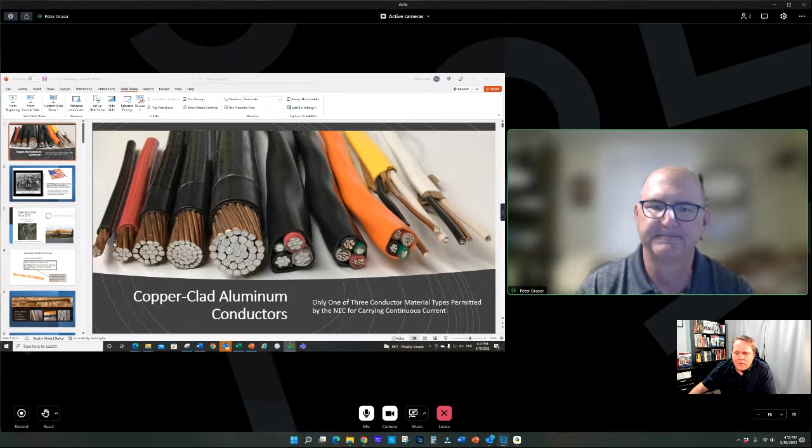All right, so are you giving me control of the screen? You got it, man, it's all yours. Okay, and so you can see this introductory page. Yep, the beautiful copper-clad aluminum that's there. We can see it, okay, good.

First off, we're going to talk a little bit about the history of copper-clad aluminum. As you can see from these conductors, these are 600 volt type conductors - that's where the majority of the work has been done with copper-clad aluminum up to this point. There's quite a variety of products made from it. From the left, you've got some THHN in different sizes, up to say 500 MCM, some NMB type cables, and CCA is also a product used in MC cable, which is one of the primary uses for it.

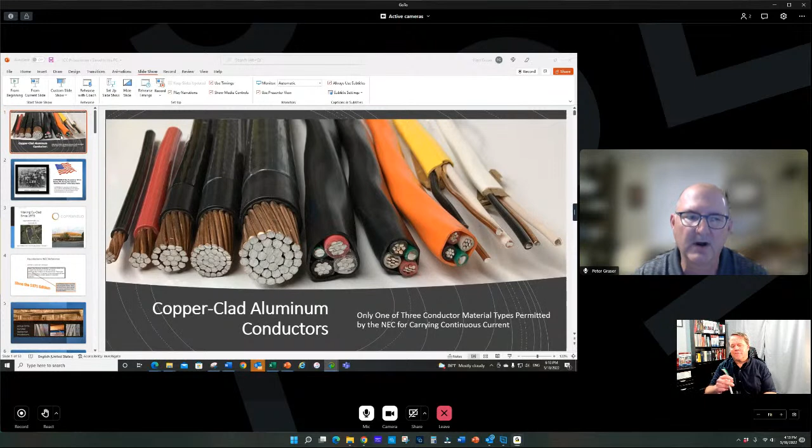So it's got a wide variety of uses. Copperweld was founded in 1915 in Rankin, Pennsylvania, and moved to Glassport shortly thereafter. It was basically, I feel - I'm biased of course - but I think it's a national treasure. It's endured the test of time, and it's a testament to the endurance of bimetals. Copperweld, at least the bimetallic division, which was the principal part of the business for most of its existence, made nothing but bimetals, and it's a testament to the product.

So today we're in Fayetteville, Tennessee, and we have a facility there. We've been making copper-clad aluminum there since 1973, 1974 - that's debatable about which year we actually started making CCA, but the plant has definitely been there since 1973. And we didn't start out making CCA.

We created CCA because of the need. There was a copper shortage. The Asian wars created this shortage of copper due to the need for brass in the country - Korea first, followed by Vietnam. It created an environment where we needed to stretch the supply of copper. Copper is a very valuable resource, take nothing away from it - it is one of the most important industrial metals to our future, and it must be conserved.

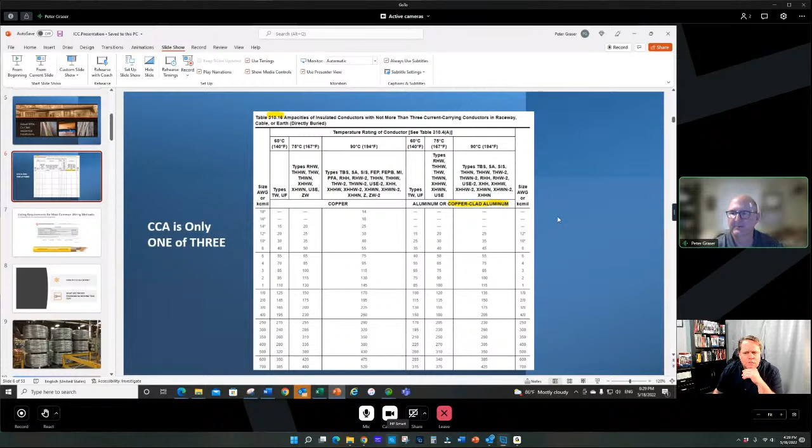Because we know that the product is being installed correctly, just by virtue of the fact that the color is the same as, say, a 14 gauge copper — 14-2, you know. So yeah, that was big. Back in the day, back in the first era, that wasn't always the case.

Can you see that? Yeah.

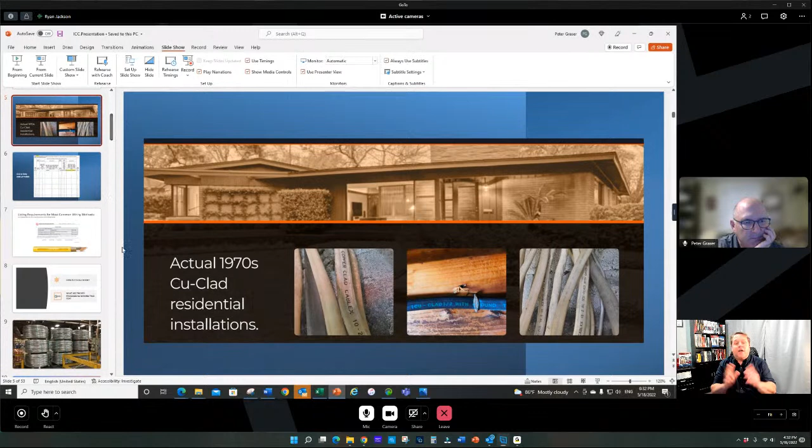I kind of liken it to water. Water is hydrogen and oxygen, but don't think of it as hydrogen and oxygen—think of it as water, because that's what it is. This is not really copper and aluminum, it's one thing: copper-clad aluminum. That whole thing is a noun. Aluminum is not the noun, and copper-clad is the adjective. It's one thing.

It's copper-clad aluminum. I say this in jest, but I'm also half serious—I'm thinking about making a public input next cycle to change the name to 'aluminum core copper.' See if that'll make a difference.

Right, it would. It would too. Yeah, people would hear that and they'd say, 'Oh, it's copper. We're good.'

Well, they did that with manufactured homes and mobile homes—they're the same thing, there's no difference. They just changed the name mobile home to manufactured home because people would say, 'Oh, he lives in a mobile home, look at him,' versus this guy lives in a manufactured home. It's like, well, they're the same thing, dude. But yeah, it's the perception.

It is, and that—but in all seriousness, we're going to try to change the perception, right? Yep.

Follow the data, because imagine that—I brought up the point about the fella at UL, back when copper-clad aluminum walked in the door. That person had to make a choice: do I just say talk to the hand, there's no way I'm going to mess with anything, or should I follow the data as this gentleman is asking me to do? And UL followed the data.

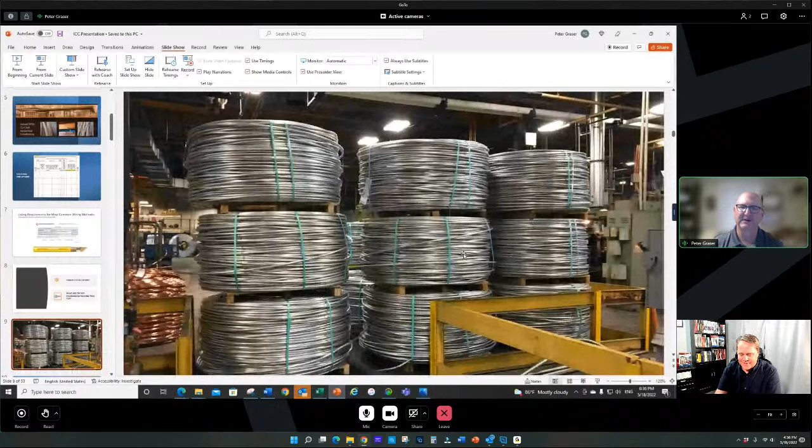So this is our starting point. This, as you might devise, is aluminum rod. This is how we receive our aluminum rod, and we have some very good suppliers, very respectable suppliers of this material that we've had long-standing relationships with. Dare I say, we love them, and we appreciate their service to us. But this is how we start.

We start with an 8000 series aluminum core. Ryan, do you know what 8000 series aluminum is? Well, I know it's the bigger and better alloy, right? Because pretty much everything is an alloy. I mean, to get pure aluminum is probably not possible, so they create an alloy, improving it. From my understanding, it's basically the newest and best alloy we have for aluminum conductors. I think they started requiring that in the early 80s, if I'm not mistaken. Yeah, that's basically right.

You can have alloys of non-ferrous metals, and alloys of ferrous metals, ferrous being steel. Stainless steel is essentially an alloy of basic carbon steel. 8000 series aluminum is an alloy of 1350, which is the purest aluminum you can get. It's not 100% pure, but it's pretty close, and it's electrical grade. 1350 is by far the most widely used grade of aluminum for long haul conduction, utility grade type applications. But for building wire, we use 8000 because of its mechanical characteristics. It was designed to have similar thermal expansion characteristics to copper at the temperatures typical of circuits.

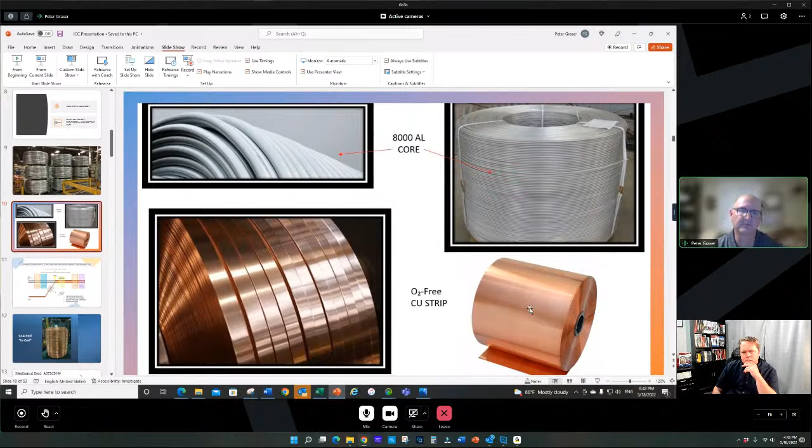Our scrap production goes down big time when we use this grade of copper. So it's a benefit not only for our production process, but for the consumer, because at the surface you've got very, very pure copper for connection purposes. So this is the magic, right?

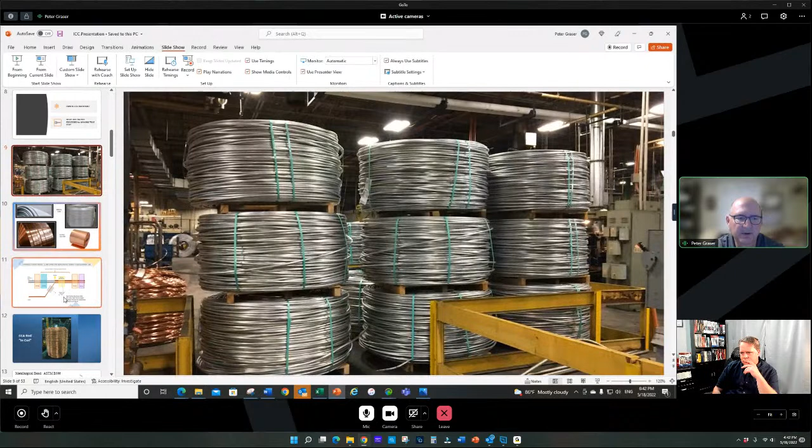And this is all done in line. We take this coil, these coils, and we start here. The strip comes in, this is all in line. We take an initial draw to size it, to make it completely round. Aluminum rod might come in the shape of an egg sometimes, it's not completely round, so you need to draw it to size it. But then it enters an oxygen-free chamber, and why do you think that's important?

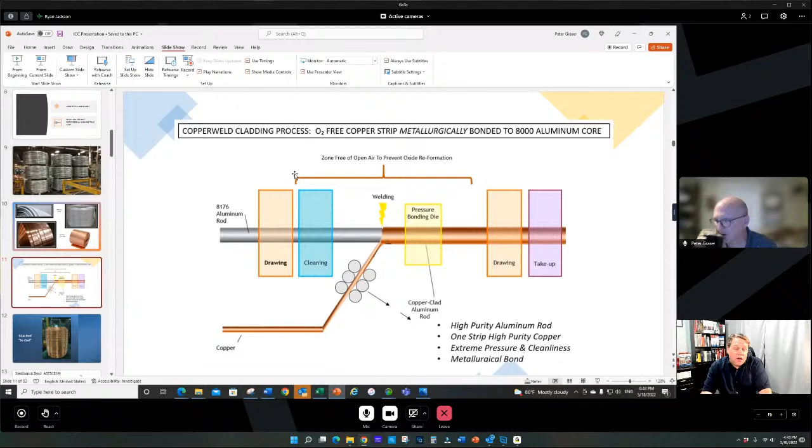Well, the thing about oxygen - somebody the other day on Facebook said, well, I'm still going to put grease on my copper-clad aluminum. Well, the antioxidant compound, when you install it correctly, when you actually follow the instructions, the first thing it says is you have to abrade the aluminum wire. You have to scratch the aluminum wire to knock off the layer of aluminum oxide that's on there, because that's the problem.

Is the oxide on the surface of the aluminum. So once we get that off, then they can apply antioxidant compound and what have you.

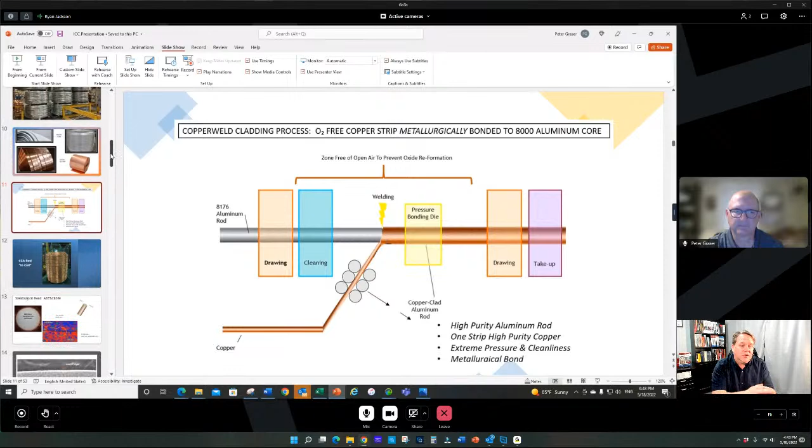But what you're saying, if I'm understanding, is you've got aluminum in an oxygen-free environment. It couldn't possibly create aluminum oxide because that requires oxygen and there is no oxygen. So there's no possible way for it to happen. That is exactly right, and that's why that chamber exists.

Now you're not going to be able to see that with the naked eye, right?

It amounts to, gosh, 15 to 30 angstroms, if you're into those types of measures. Peter, listen, you're in America. The only people that understand the metric system are scientists and drug dealers. I'm not either of them, never have been. So I kind of think I know what a micron is. I don't have any clue what the other thing you just said is, an angstrom or...

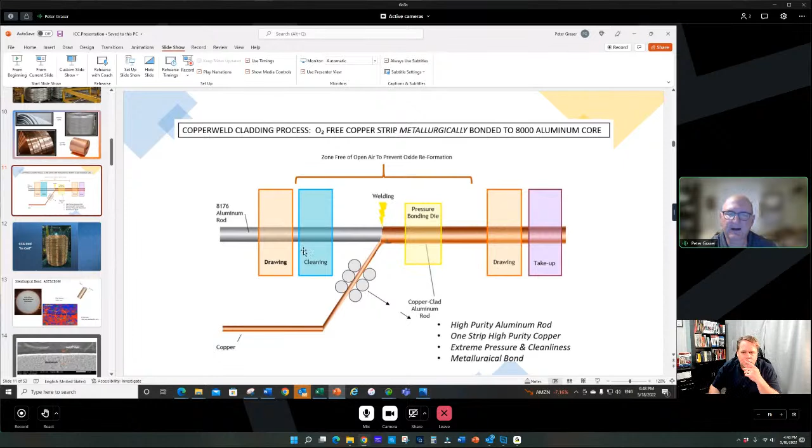It's a process that happens inside of this oxygen-free chamber. This is the special sauce. I can't show you this, I can just demonstrate it to you in a box. But the concept is you've got to scalp off, you've got to remove 100% of that aluminum oxide.

And imagine this rod is moving at a constant speed. It's moving, so this is all a dynamic inline process. All these things are happening at once. So the rod enters the chamber, it's clean, and then this is where the other magic happens. Through a series of welding and pressure, we create that metallurgical bond. We create that alloy layer. Alloys are created when heat melts them together, basically. And so at the point of union, that pressure is so high that the heat from that bonding process creates that metallurgical brass layer.

Once that happens, it ceases to become two metals, and it's a bimetal. You could give me the sharpest blade in the world and I could not scrape the copper off - there's no point of transition, it's melded together. If I wanted to strip this copper off, I'd have to get chunks of aluminum coming off with it. You can dig down into the aluminum, but more than likely you're going to take off a chunk of aluminum along with the copper, because it's bonded.

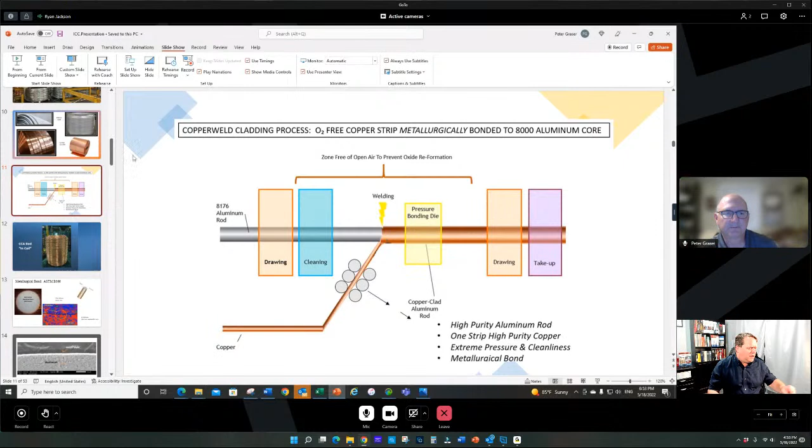There was another question I'll try to take a stab at. He's saying, okay, I understand the aluminum inside the wire won't oxidize and the copper won't oxidize, but what about the very end where you cut it? My thoughts are it could oxidize, but so what? When you terminate it, you're using a set screw lug that goes into the copper, or twist-on connectors that go onto the copper. I'm trying to think of the importance of the exposed end oxidizing, and I can't think that it would matter.

No, I don't think you're wrong, I think you're dead on. And it goes back to the philosophy of terminating wire. Ryan, I'll ask you this: what happens if moisture gets into the interface between current and material? Bad stuff.

Bad stuff, bad stuff. What's interesting about the engineering and design of connectors is that they're designed to keep moisture from entering that material-current interface. If that happens, you're going to get a short circuit of some kind. So connectors are designed to keep moisture out - anything conductive, connectors are designed to keep that dry. Even connectors that go underground or in wet outside environments are designed to keep that interface dry.

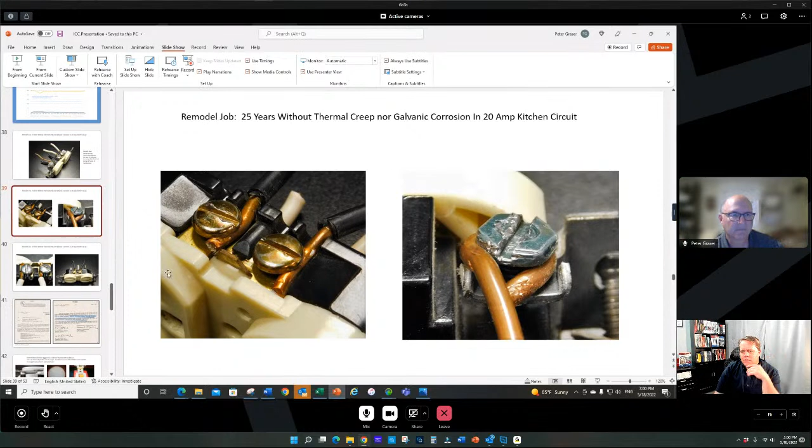All right. So we talked about the manufacturing process, and a little bit about this, but maybe we'll underscore it. Ryan, pop quiz: how is CCA different from aluminum? How is copper-clad aluminum different than aluminum? I'm gonna go ahead and say that one has copper cladding and the other doesn't. I'm not sure where you're going with this. I'm not quite sure what you're fishing for, but if you're trying to catch a sucker, you probably just did.

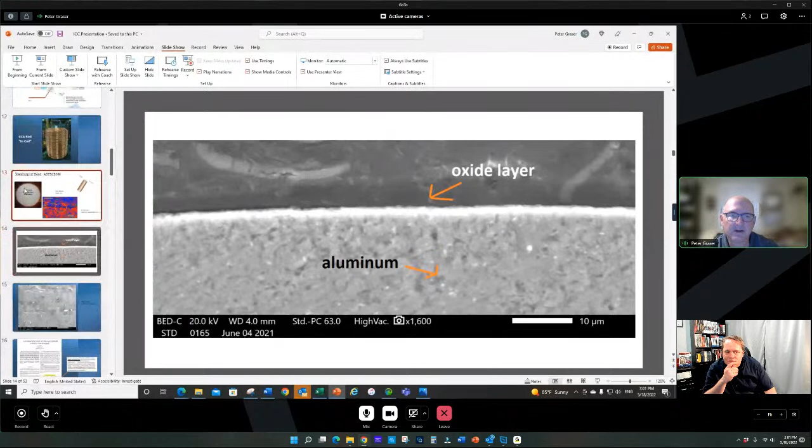Well, number one, copper-clad aluminum doesn't have this rascal—no aluminum oxide. That has been evacuated, it's no longer part of the equation. What's happened is we replace this material, the aluminum oxide which is an insulator, with oxygen-free copper, and we metallurgically bond the two. So when we do that, it becomes a different metal.

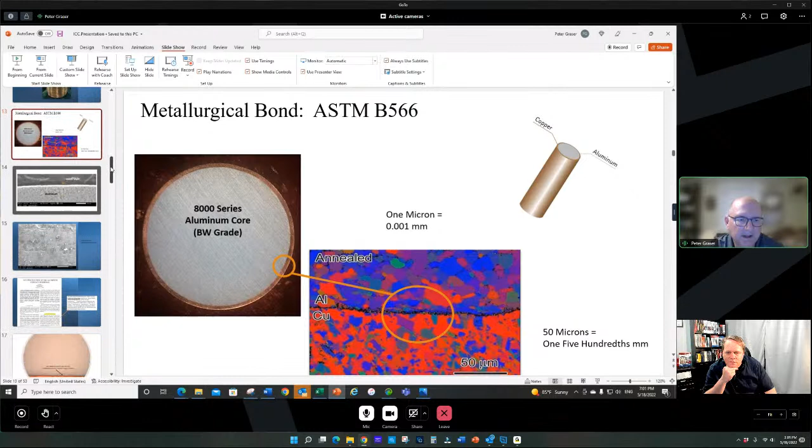I've got a little thing here—this is a transversal shot of what it looks like if you take a slice, like with a cheese slicer, and look at it crossways. It's not a small amount of copper, right? No, it's not, it's a surprisingly big amount, to be honest. It's a deceptively big amount, I should say. It's 12 gauge, and I guarantee, Scout's honor, this is not a doctored photo—this comes right out of the micrograph.

But looking at it this way, it probably makes more sense. Copper-clad aluminum, to the ASTM spec, must be 10% cross-sectional area, and 27% copper by mass. So you're looking at a chunk of copper over your aluminum.

One of the jokes I make to anybody that'll listen, even to my wife on occasion, I'll say: 'Honey, what's the best oxide inhibitor you could have for an aluminum wire?' And she shakes her head—I've heard this a billion times. 27% oxygen-free copper. Wow.

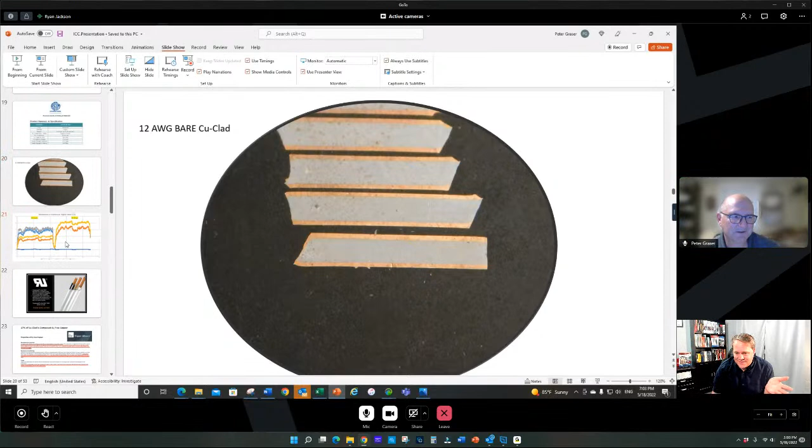And she doesn't laugh, and she doesn't know how lucky she is. I mean, to be able to come home to that every day. Man, I tell you.

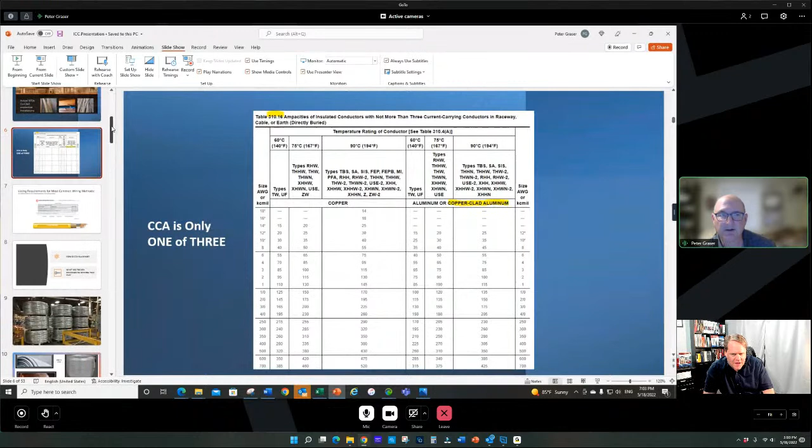So how do you explain that? The only reasonable explanation that we've adopted is that the 27% copper cladding really helps, as far as giving off the heat.

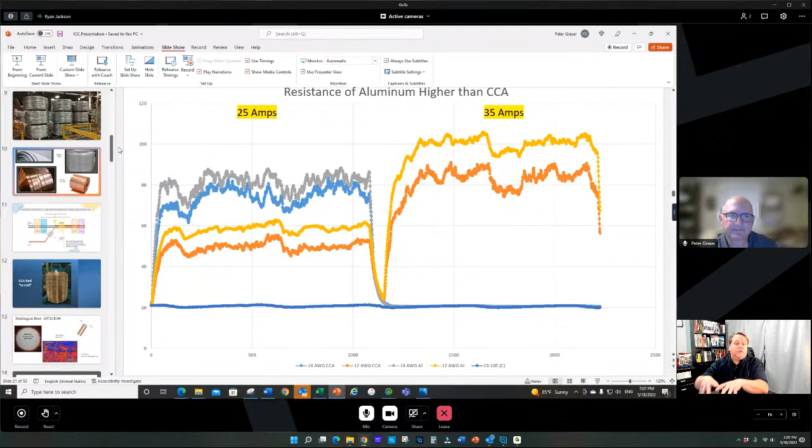Could we develop a third column that just does CCA? Probably, and it would probably end up between copper and aluminum, and you might gain an amp or two. So is it worth it? I don't know, but it's not there now. So when it comes to sizing the stuff, it ain't copper, it's everything else. It's sized like aluminum.

And that's the safe place to be, and code is built all around safety. That's what it's all about. And quite honestly, it's not a bad place to be in this column, simply because we know we're safe.

One of the things that I tell people is that Copperweld is a 107-year-old company. We have a very proud tradition and a brand to protect. We're the most conservative company on the planet, in my opinion. But quite honestly, we're not in the business of putting the public in danger or putting a product out there where our brand would be tarnished.

So we believe in research, we believe in performance testing, we believe in NRTLs and third-party testing, we believe in the NFPA and the good work that they do. But we're all about testing and data, and that drives our decisions.

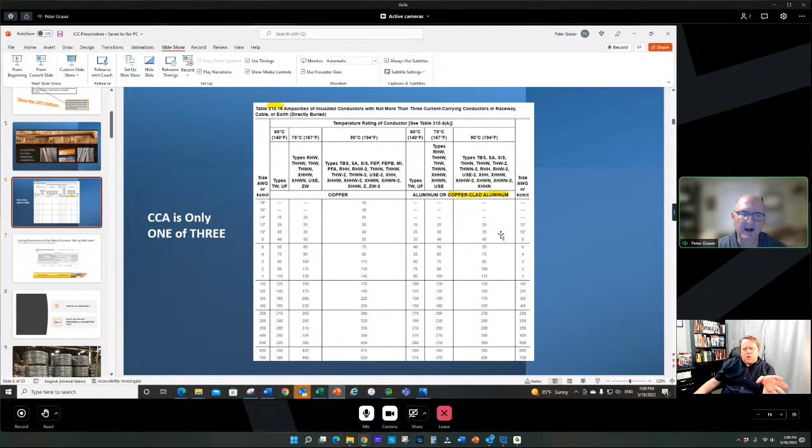On the testing and data part, there's a question that came up on the chat board on YouTube, and it comes up all the time. I hear it about expansion and contraction. What can you tell us about that? Because, well, I'll put the ball back in your court. I am a metalhead, but you're the metals guy, so your turn.

Well, it's probably a good time to talk about what makes a good termination, because I'm sure the expansion question is all about terminations. I think the terminations are what people really need to know about. One of my mentors in the non-ferrous installation world told me one time, correct me if I'm out of line here, because I certainly don't have your extensive experience being an inspector or an ex-inspector. Once an inspector, always an inspector, right? Right. Absolutely. But terminations are an issue, right? That's a lot of problems.

Dare I say 80% of the problems that happen in electrical installations happen due to poor connections. Am I off base saying 80%? If anything, you're low. I think it would be probably even higher than that.

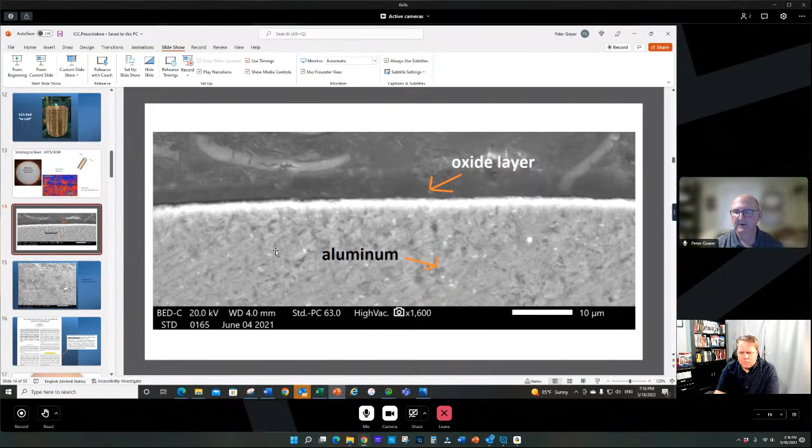If current can't pass through there, or is restricted, the current density is massive, trying to force its way through cracks, you're going to get heat. You're going to get more heat than normal, right? I'm not saying every time, because there's a lot of aluminum connections out there that have lasted. So that's the peculiar thing. It's not an every time thing where aluminum will overheat, but where you've got restriction of the current, that's where it happens.

And 1350 having thermal characteristics lower than that of 8000 series, it's affected more when this heats up. So this is a controversial subject. Obviously there's some failure mechanisms that are general knowledge, but we have to remember that aluminum is an excellent conductor. It's just that it has to be treated correctly and terminated correctly.

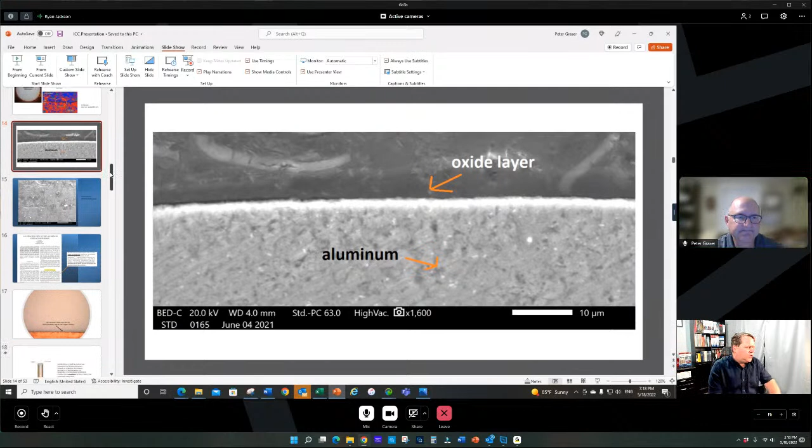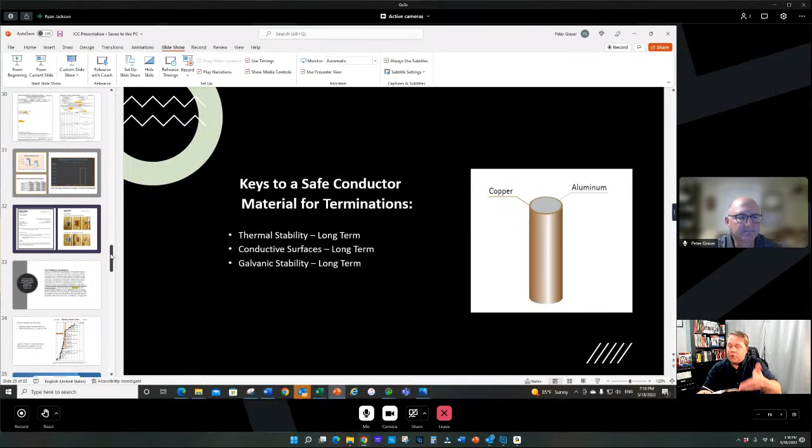Right. So how do we terminate copper-clad aluminum? I've got, this is copper-clad aluminum that I have in my hands, some NM cable, and when I put it under a twist-on wire connector, it's copper touching copper. That's that. It doesn't seem to me that I should need to do anything too out of the ordinary to copper-clad aluminum, because it's copper touching copper. It's not the copper touching the aluminum part.

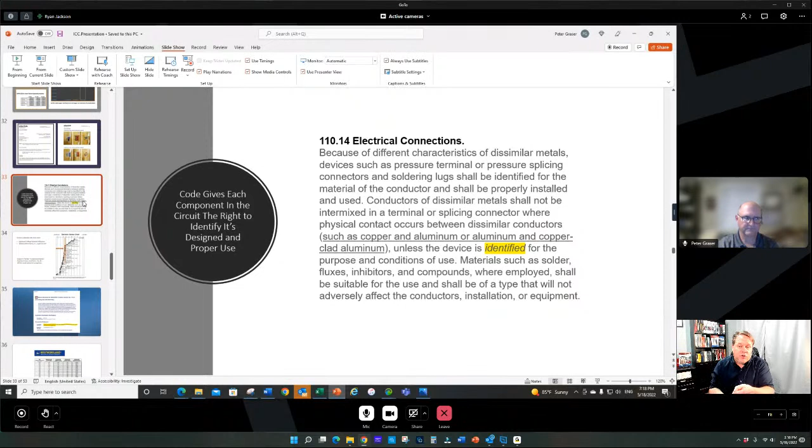You guys already addressed that, right? In the field, I can't even touch the aluminum part if I wanted to. So it's copper to copper. So can I just put a regular twist-on wire connector over it? Or can I land it on switches and receptacles? Because these are, and you know this, these are the questions the guys in the field are just hitting me over the head with.

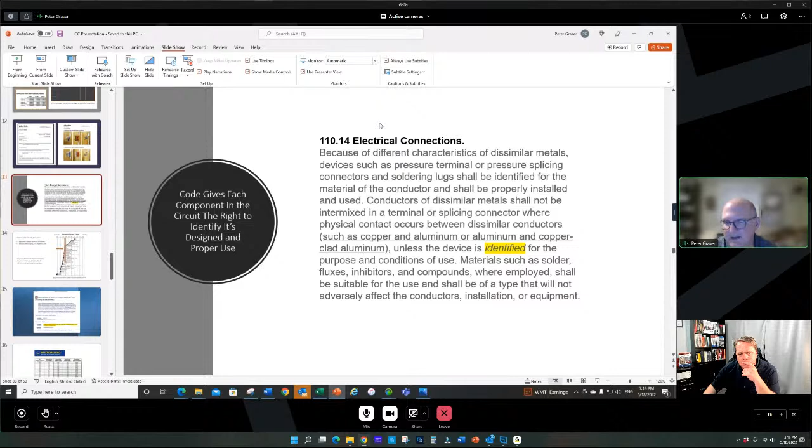So, as you know, it's a mixed bag, right? And obviously, in code, in 110.14, CCA and copper are seen as similar metals. Meaning, for this application, electrical connections, copper-clad aluminum and copper are similar, right?

So this is from the 2020 cycle. This is the second revision committee statement from Code Making Panel 1. And it reads, copper and copper-clad aluminum have been deleted from the dissimilar metal list for the application of this requirement. So, and then in this cycle, in the 2023 cycle, Code Making Panel 1 reconfirmed that.

Nobody argues that CCA and copper are similar metals. A growing number of people understand the science behind it and why that's so. It's certainly not everyday common knowledge. It's not like Wheaties - everybody knows what that is. But the plain fact of the matter is, from a termination point of view, it's copper, more like copper than aluminum. And from a metallurgical point of view, it's a similar metal to copper.

So if you look at some UL guidance: are copper-only residential light switches, and the same one, are copper-only residential receptacles acceptable for use with CU-clad conductors? Yes. And this comes from the guide information, the white book - you can get all this stuff online now. Terminals of 15 and 20 amp receptacles, not marked CO/ALR, are for use with copper and copper-clad aluminum conductors only.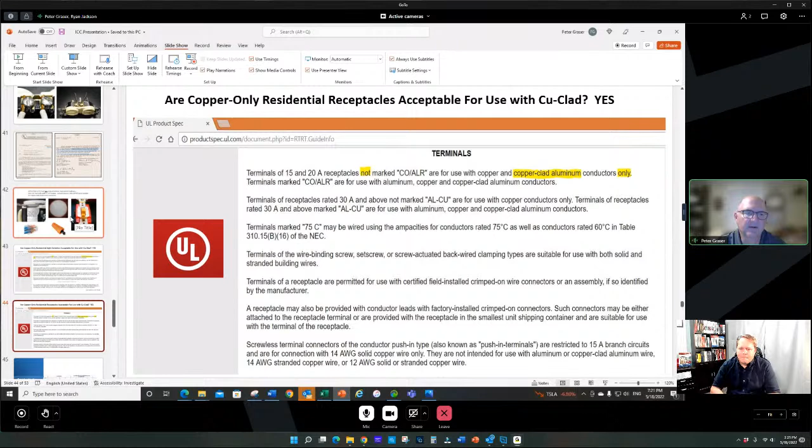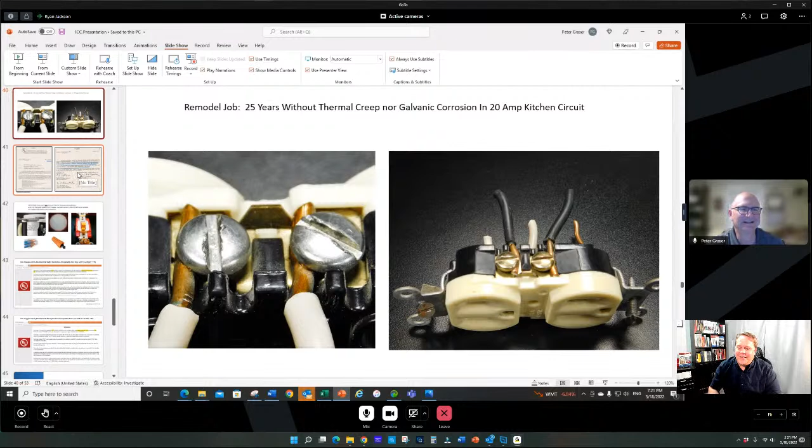So here, UL is making the statement that in wiring devices, it's similar. So, even though this is not very good workmanship, this is how you terminate copper-clad aluminum. Of course, you're not... I mean, I'm gonna screen grab that and play it on a loop - this is how you terminate it.

But from a physics perspective, from an electrical perspective, we terminate it like it's copper, right? You size it like it's aluminum, you terminate it like it's copper, and really, that's it. Most of the discussion, I think, we spent trying to clarify why we do that. Why does it carry current like it's aluminum? Well, because it mainly is. Why do you terminate it like it's copper? Well, because the surface is copper. It really makes a lot of sense, quite frankly.

And the absence of that oxide layer - it's really, if that oxide layer existed, it wouldn't matter how much copper you put on there. Removing that oxide layer and replacing it with something that is conductive, that's really the science behind this. And the fact that we upsize it, derate it if you will, makes it even more interesting, because of the fact that it's a very conductive material.

And after I go through this, I want to move on to some testing that we did through the bimetals task group. Can I ask you one more question as far as terminations, before we move on though? What about torque? When I have a torque value marked on a termination, how does that change whether I'm using copper, aluminum, or copper-clad aluminum?

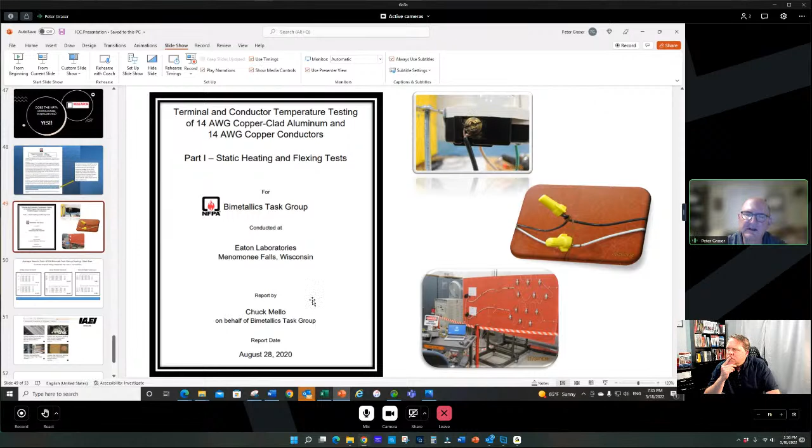So what this tells us is that CCA at 10 amps, which was the proposal, generates less heat. That heat rise at points of termination - these are like thermocouples measuring how much heat is generated under this twist-on splice connector, how much heat is being generated here, how much heat is being generated at a circuit breaker terminal at these prescribed or proposed ampacities.

Am I misunderstanding this, or is this just really surprising? I mean, you put it in a 20-degree ambient temperature, and for copper-clad aluminum, the temperature at the connection was 26.6 degrees. And you're saying that in the same room, the temperature at the copper connection was 31 degrees? Or am I misunderstanding that completely?

I think you're seeing it pretty clear. And don't blame me, this was Chuck Mello and Brian Rock's fault. I'm absolutely blaming Chuck and Brian, no problem. But that's just so surprising. I mean, and Tom Mitrovich too, I can blame him, no problem there.

That just seems so counterintuitive, because is that basically saying that the copper-clad outperformed the copper? That's sure what it seems like to me. I'm not a scientist, so I don't fully understand those numbers and the ramifications, but that's what it seems like. I plead the fifth. Fair enough, Chuck is typing furiously, I'm sure.

All this information is public, this is just a little summary sheet. But the genius of this thing here is that it's graduated, right?

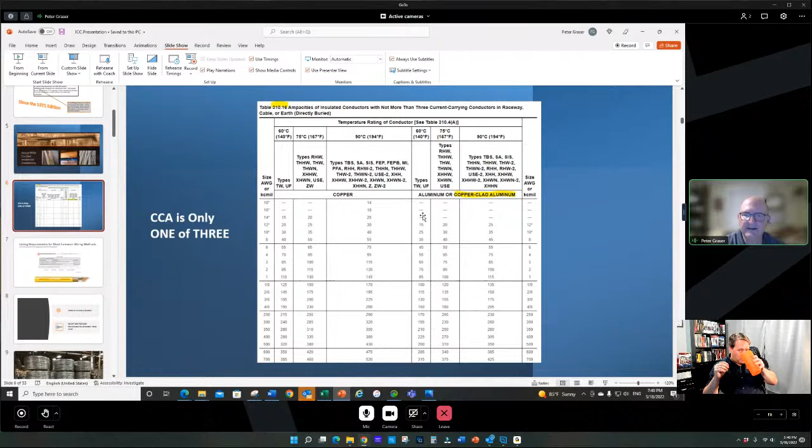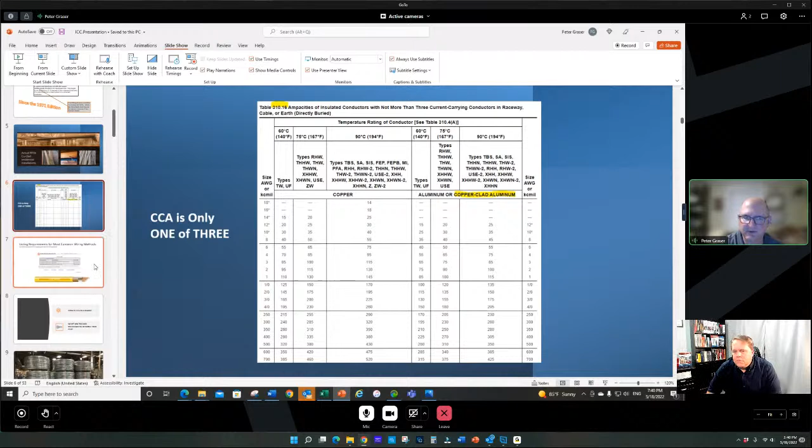And what it tried to do is right here, add 14, and this 60-degree column, it would be 10, right? And what it says is that when you run 14 CCA at 10 amps, which would be used for like lighting circuits, LED lighting circuits, dedicated LED lighting is one of the uses that could be employed. And you compared it directly with 14 copper running at full 15 amps, right? This is what you'll get.

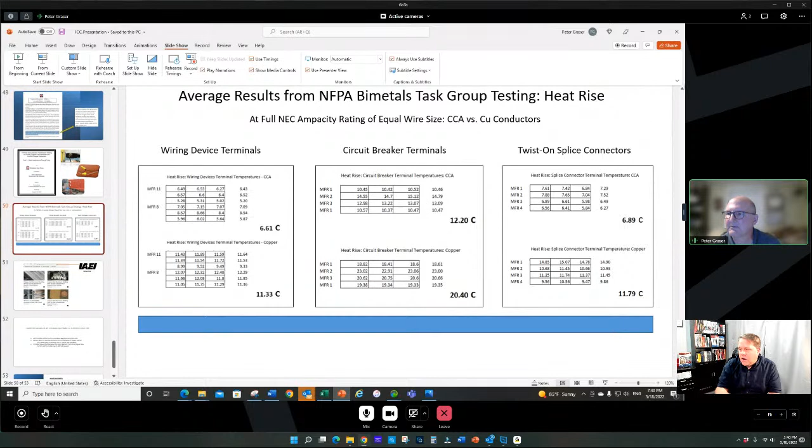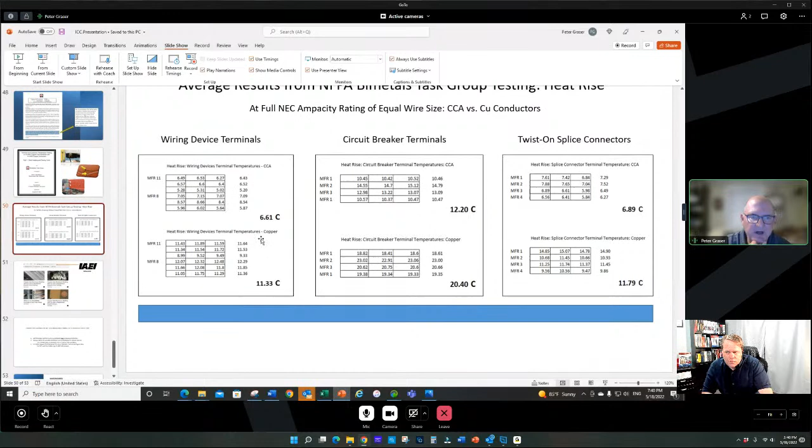Oh, so that was compared to the different size. Okay, so we're looking at 14 gauge copper compared to 12 gauge copper-clad aluminum. Right, okay, now that makes a lot more sense. This is 14 copper. This is 14 copper-clad aluminum compared to 14 copper. Oh, it is size to size. Okay, interesting.

Okay, so this chart could be a little clearer, but this is strictly relating 14 CCA to 14 copper. And it looks like a lot of comments from people that are interested in learning more about these and reading the studies. Yeah, go to NFPA's website and you can download them for free.

Chuck just mentioned the sizes are the same. The 14 gauge CCA was tested on a 10 amp base, and the 14 gauge copper was tested on a 15 amp base. And we're kind of falling back on Chuck on this because he was the one that ultimately put the data together and presented it.

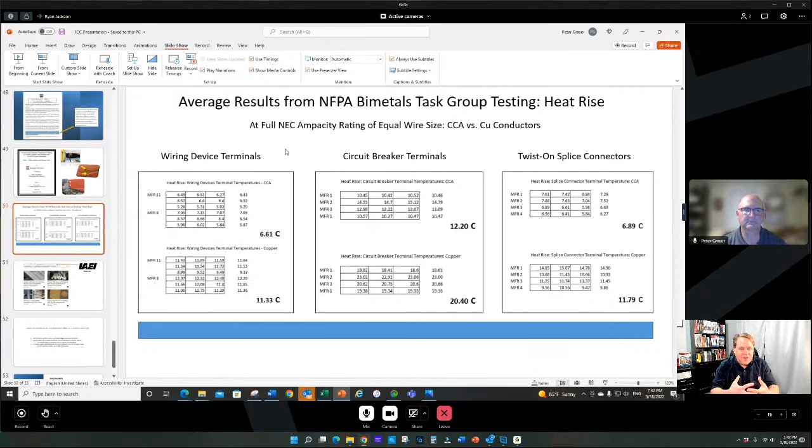And I'm not going to speak for Chuck or for you, but Chuck comes from a product testing background, right? He was with UL and with Intertek. That's product testing, that's what Chuck does. So yeah, very well qualified to do the report. Well, he had a lot of help. There were very talented people in that task group, and let's face it, that task group was doing some pretty monumental work. Yeah, and I was honored and very happy to be part of it.

It was a long slog, that's for sure. Nearly all of 2020. But yeah, there was some good information, and like you mentioned, it's all public.

You can get those test reports from the NFPA website. And if you want to contact me, I can certainly supply the test reports to you, and you can crunch the numbers yourself and make up your own mind.

I'm not here to preach any one thing over another. I follow the data, and that's what Copperweld and yours truly are all about.

So right now, as far as the code is concerned, we can install copper-clad aluminum. We've been able to install it for the last 50 years. Some things may or may not happen in the 2023 code—that's not set in stone yet. But the things that are set in stone is you follow manufacturer's instructions, you size it like it's aluminum, and you pretty much terminate it like it's copper.

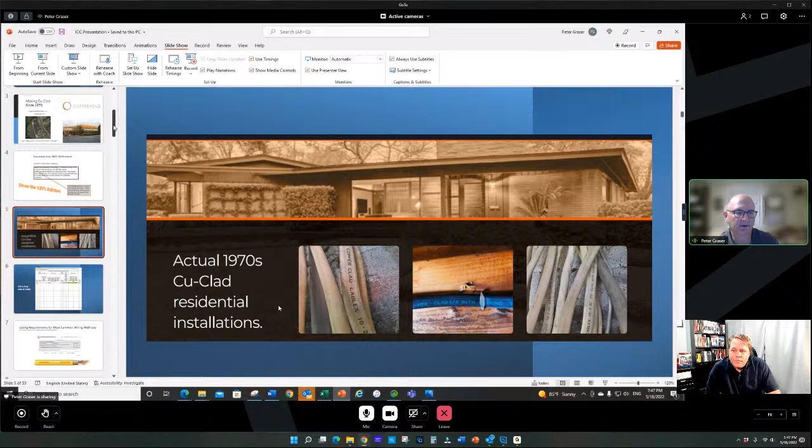Basically, I mean, we have right at 50 years of historical substantiation. When these products started back in the 70s to be installed, there were no CoAl or CU-AL wire connectors. We've pulled many receptacle boxes and intact receptacles like these, with splice connectors on them, and there's been no issues, right? So that's only part of the story, right?

That's one data set that we have, but we also have performance testing like the Menominee Falls, that actually tested 4 different varieties of wire nuts. This is public third-party stuff, and we have more performance testing other than this backing that up.

So when you say identified, you can't take it lightly, right? Right, because essentially you're standing behind your product. The product is designed for a certain use, and that's what the identification is all about.

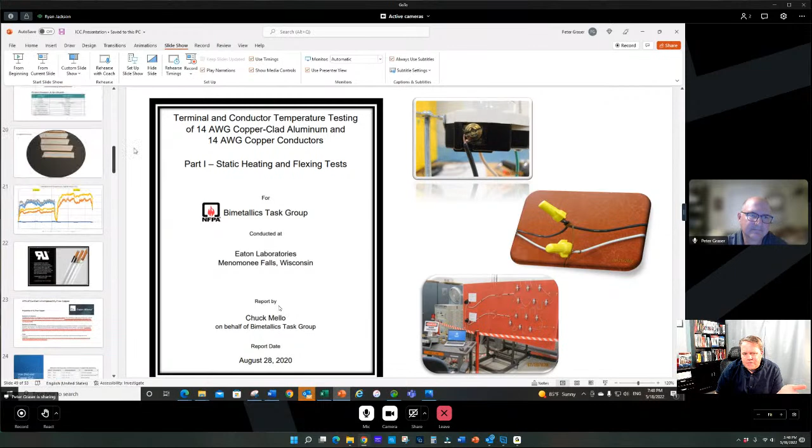I had one question asking are any planned updates to Article 250 regarding copper-clad aluminum. I think they did most of that in the 2020, if I'm not mistaken—250.68, or 62, and I think it's pretty much already there. Article 250 already allows for copper-clad aluminum. The main bonding jumper can be copper-clad aluminum, equipment grounding too. I think it's pretty much all there. So to answer the question in chat, I can't think of anything that needs to be updated in Article 250.

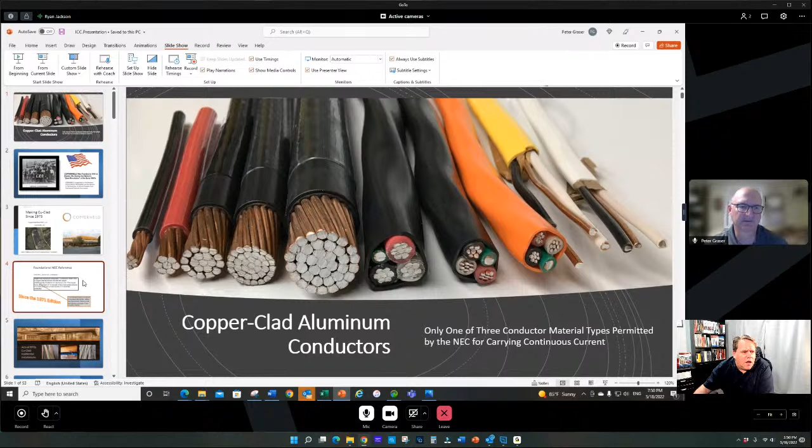What's the difference between copper-clad aluminum and tinned copper? Do you know anything about tinned copper? Well, tin copper - you put the tin on there for corrosion purposes. Obviously you can do the same with copper-clad aluminum, but Copperweld doesn't do that. Not to say you couldn't, but tin is designed to prevent corrosion.

And then one more - is there any difference between the CCA manufactured back in the 70s versus the stuff being made today? For example, a more advanced process. I'm guessing the aluminum alloy is certainly different. Well, I can't really speak to how it was done back in the 70s, but from what I know, back then it was 1350 - that's been the primary alloy. Again, that alloy, when cladded, when you remove that oxide layer, does quite well. We have a lot of legacy installations that do their own talking.